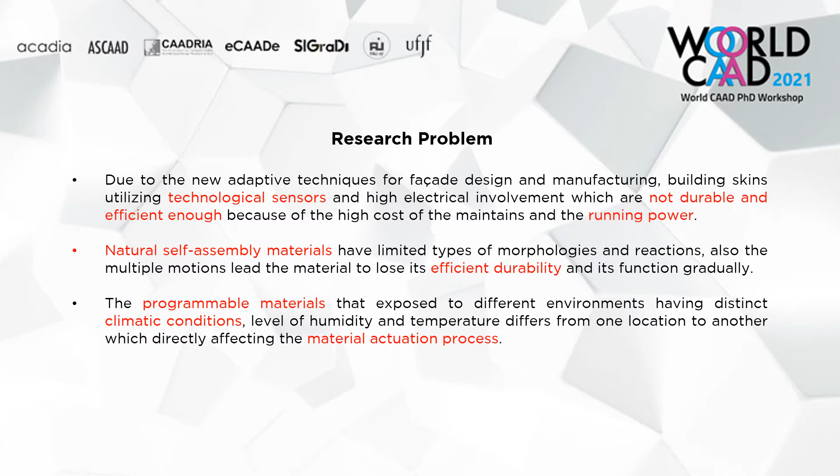In the first part of the research, there will be a classification to identify the selected material to be studied and tested, and also the external stimuli that will affect the material during the research, and the experimental methods and phases. Also the type of movement and motion, the type of controlling and actuation, and the time that the material will respond, and the scale of the material.

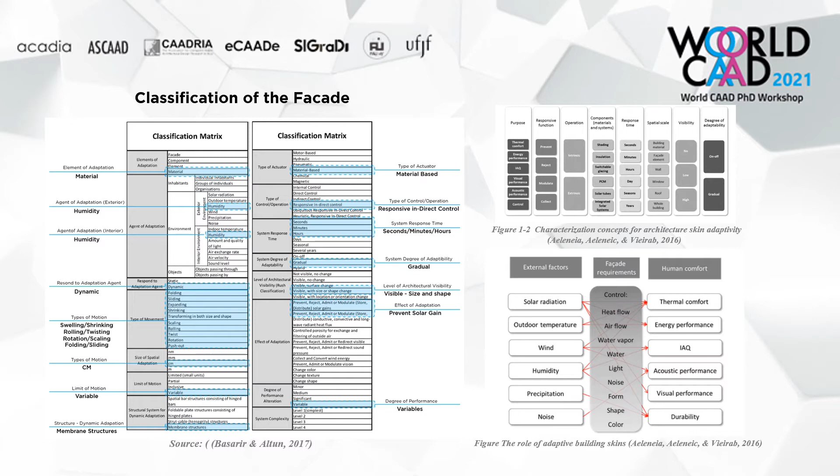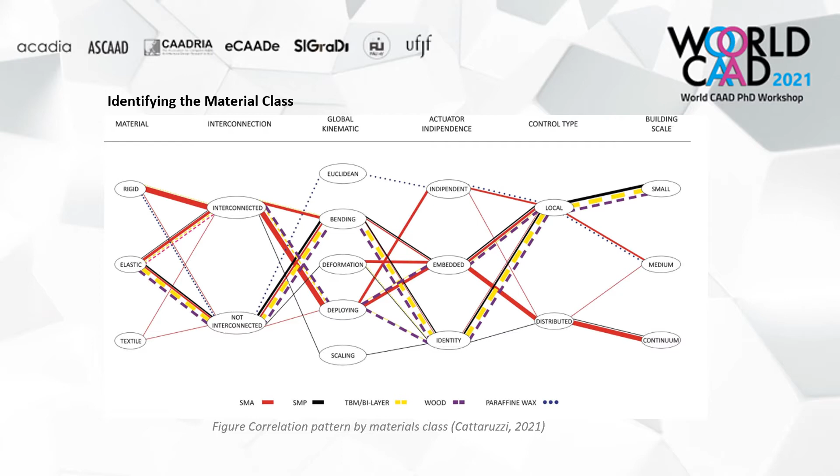Then the research will concern identifying programmable materials with different morphologies and actuation types, identifying the material class, the material type, global kinematic motion, actuation and control type, and also what building scale the research will concern.

In the second part, the research will concern the biomimicry process, focusing on the hygroscopic material scope, where materials swell and shrink under different levels of humidity affected by the external environment and stimuli.

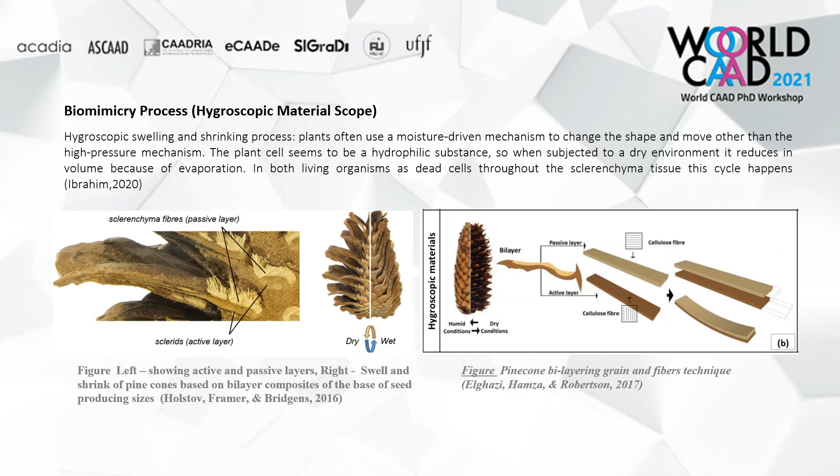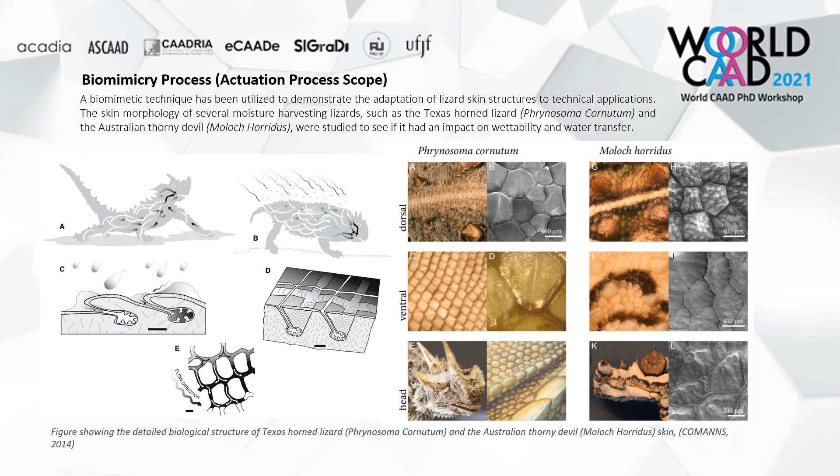The second biomimicry process will concentrate on the actuation process scope, learning from Thorny Devil and Horned Lizard skins the adaptation process while absorbing the maximum level of humidity and moisture from the environment, and how they can transfer it through their skin. Then the research will implement these inputs and this database into an experimental phase through testing.

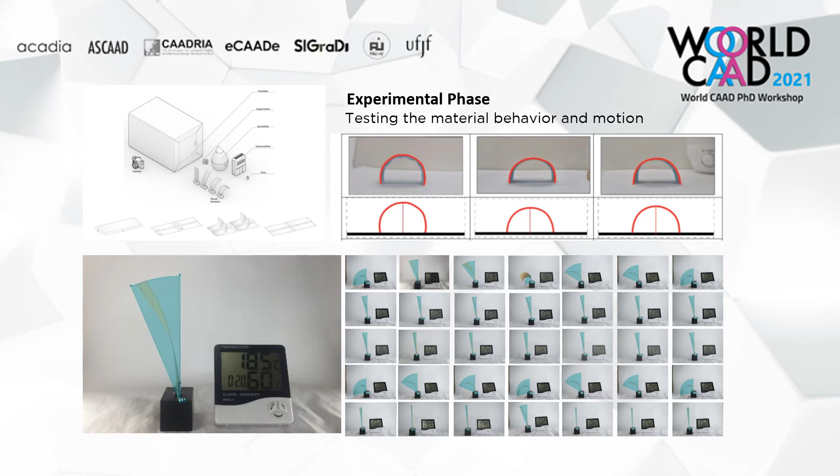Testing material behavior and motion using different materials, laminated materials, under different humidity and temperature levels. Based on the experimental phase and the observations, the research will conclude a morphological matrix of the material's morphological capabilities.

For instance, if we take into consideration the hygromorphic material parameters, like material type, artificial wood, cut orientation, lamination, perforation, and so on, we examine how these parameters can affect the material to produce a specific morphology and motion, like twirling, rolling, rotating, bending, twisting, and so on.

Based on these parameters and morphological capabilities, we can conclude for each morphology and deformation the parameters that affect that specific transformation. So in the research we can conclude a morphological matrix for the transformation and deformation based on specific parameters of the material utilized.

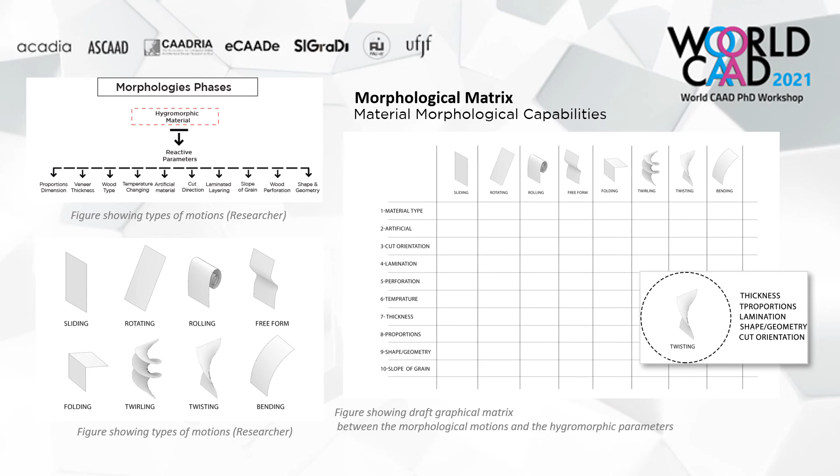From this point, we can conclude a cumulative programmable composite with different layers and different parameters to produce a specific morphology that adapts to external environmental factors.

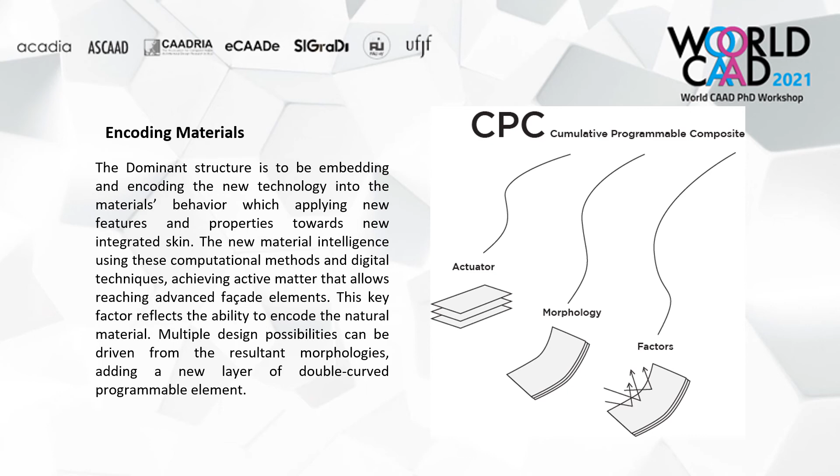For a verification process, a prototype of the designed programmable material unit will be fabricated using 3D printing, CNC milling machines, and other digital equipment to produce a real-scale unit to be tested under different conditions or a specific condition for an architectural skin at the end of the research.

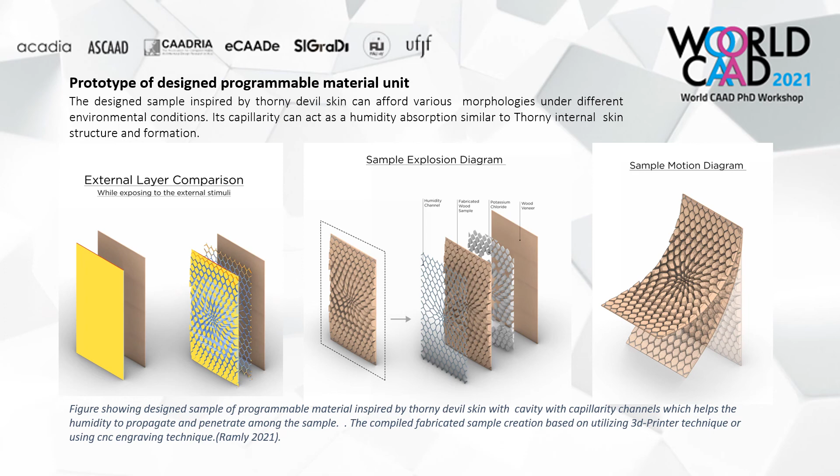Computational and digital scripting and programming will be introduced in this part of the research, also to make the programmable skin workflow more parametric.

The actuator or material parameters will be connected to the final morphological type and transformation, so based on the inputs of the parameters, or merging between multiple parameters, the script will conclude a specific morphology based on these inputs, and so on.

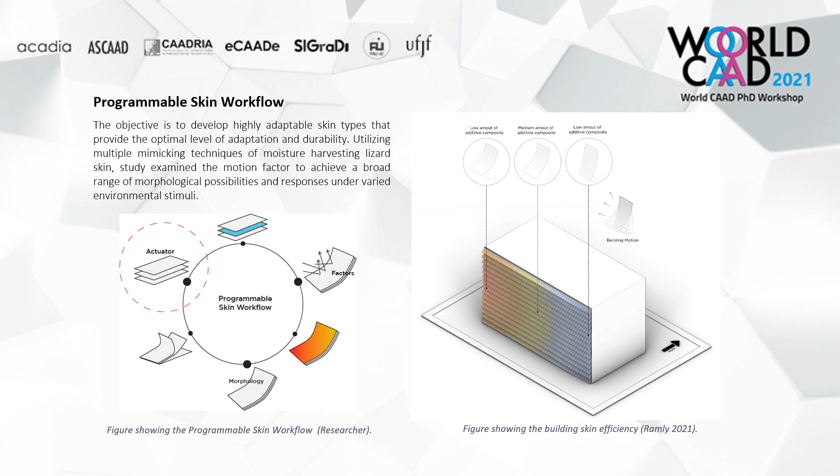Then simulation will be involved to determine how efficient this morphology will be for the building and for human comfort inside the spaces. Thank you.